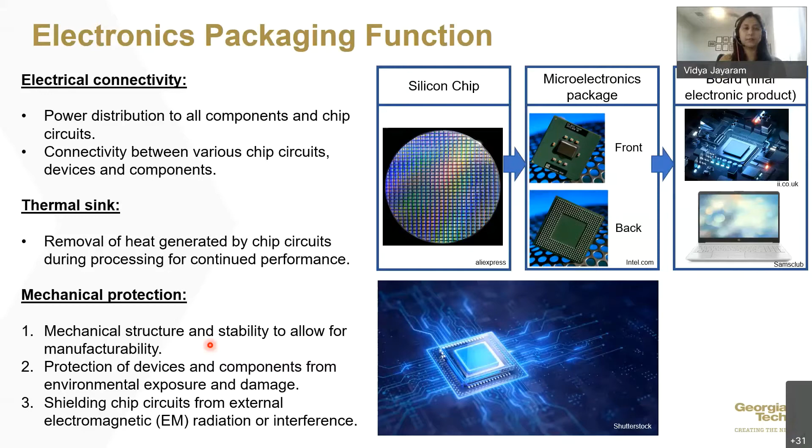Let's go a little bit deeper into what system level packaging is. I've described a high level process flow from chip fabrication to system level packaging to the OEM assembly where it goes to the final consumer. We'll focus on system level packaging, which involves the chip and board level packaging, and what the key differences would be.

However, there are some key differences when it comes to both of these. Typically, the chip level interconnections are tighter in pitch, smaller in size compared to the board level, which is much larger.

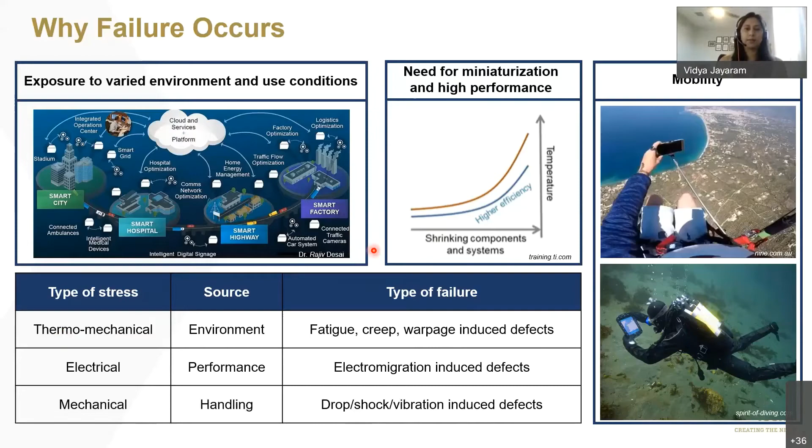So what's important here is, because of these drastic conditions our packages might experience, failure is something that is inevitable, and it's part of success. So it's important to learn from them, understand what is causing them, understand the time to failure, and how that can be managed to predict these fails and apply them to our end use case, making it sustainable and reliable for the time it's required to be functioning.

So it will never be a single point solution. It will always be a unique solution to each problem with all the interdependent factors. However, the interdependent factors are interesting, because understanding the impact of failure, how it can be managed, the impact of cost, and how many years it needs to be sustained, the concept is very similar. So with every growing trend or next improvement, it's important to understand all the failures we've seen so far, so we understand how to delay or manage it for the next improvement.

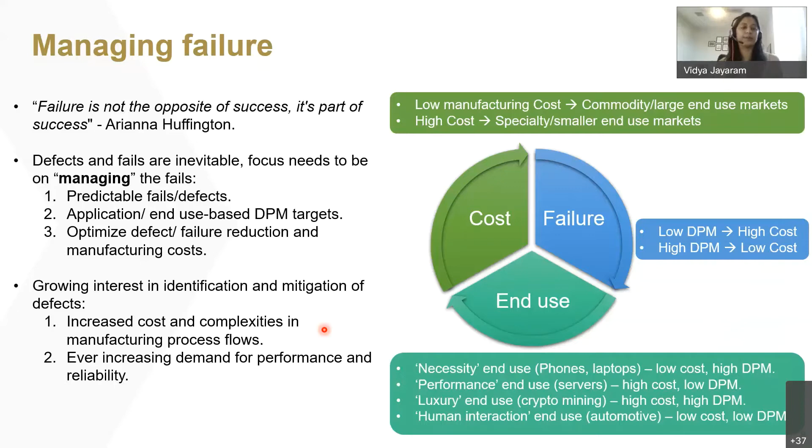So with managing failure and extending reliability, there are four main steps or guidelines to assessing failure and designing for a more reliable system. The first is identifying the failure mode and how to detect it based on expected failure modes seen in previous learnings, developing a risk assessment. Once you have that, you move to failure prediction, using tools like modeling to predict stress locations and failure modes through input of existing experimental data from previous learnings, extending that to your use case.

Once you have your failure modes identified and some understanding of what kind of failure you'd predict, you move to performing accelerated stress tests, selected based on what you've learned and what the model has predicted. Once you have this data, you're ready to design for reliability based on your package design, architecture considerations, material considerations, and process optimizations. We'll go a little deeper into each of these steps.

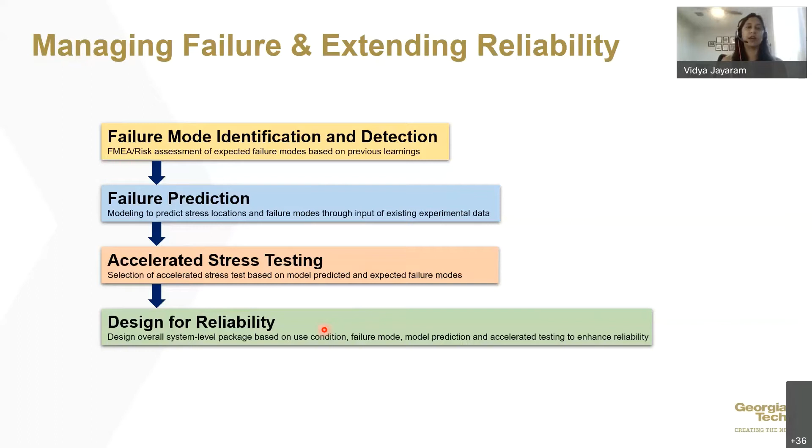So let's start with failure mode identification and detection. I have listed out in the following slides different types of failure modes that we would see in interconnections at the chip and board level, and understanding where these failures are coming from and what their mechanism is.

Starting with solder joint voiding, this is a common failure mode that we see in interconnections. They can have multiple causes for the same kind of failure mode. The first one here, you can see voids that are formed during processing. For example, when you have excess flux that is entrapped, and when this package goes through reflow, the reflow conditions may not be optimum, where it doesn't allow for the volatiles to escape efficiently. So they get trapped inside the solder, and that's how they form the solder voids. This is more of a processing related defect or failure.

But another type of void formation can be electromigration induced. This can happen over time while the product is in use, where it's a current driven diffusion, as you can see in the mechanism here, that's causing these voids. And electromigration can also cause the voids to grow and cause solder cracks or opens. So it's really important to understand when you see a failure, what is causing that.

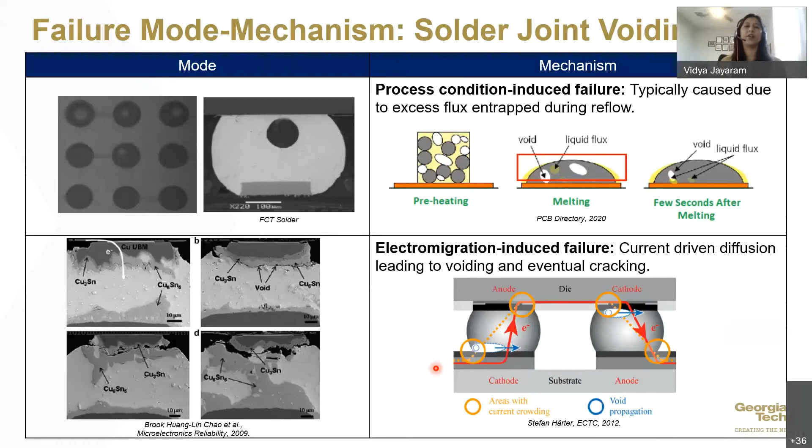Another type of failure is solder joint cracking. You can see images here of similar types of failure that are induced by different mechanisms. Looking at a process level mechanism, this could be warpage induced, typically caused by CTE mismatch. You have a silicon chip that is assembled on, let's say, an organic high CTE substrate. Because of the high CTE mismatch, you would see either a smile shaped or a frown shaped warpage, and that can lead to tensile stress. For example, where you have a smile shaped warpage, you can have tensile stress at the corner bumps, and that tensile stress can then lead to solder joint cracking.

Another type of failure mechanism for this crack is fatigue induced. This is more of thermomechanical stresses that are experienced by the solder joint. For example, with repeated heating and cooling cycles that can cause high shear strain, again leading to crack initiation and propagation at the weakest interface, which would be between the copper pad and the solder at the IMC interface.

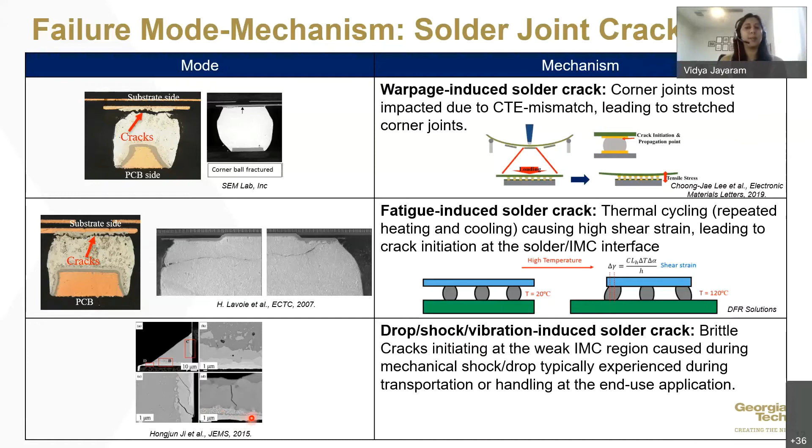Moving to the solder non-wet and open, again, there can be multiple mechanisms. The first one here is, again, warpage-induced failure, similar to what I mentioned in the previous slide, where because of the high CTE mismatch, you would see either a smile-shaped warpage or a frown-shaped warpage. For example, for a smile-shaped warpage on the corner, in the previous case you had a tensile stress that the bumps experienced because of being stretched, but there can also be cases where the corner bumps don't touch the pads, and that can lead to a non-wet or an open circuit.

And in some cases, you have the bump touching the pad, but it hasn't made a good enough contact to actually form a joint. So that can also lead to non-wet.

Another interesting mechanism for having a non-wet or open are bake-induced solder opens, and that is also more thermal stress induced. At higher temperatures with some level of humidity during bake, this can result in the solder being consumed to form the intermetallics, which can lead to reduced solder volume in the actual bump and lead to non-wets or opens. This would be a higher risk for reduced solder heights that you typically see at chip level, which are more prone to this bulk solder consumption.

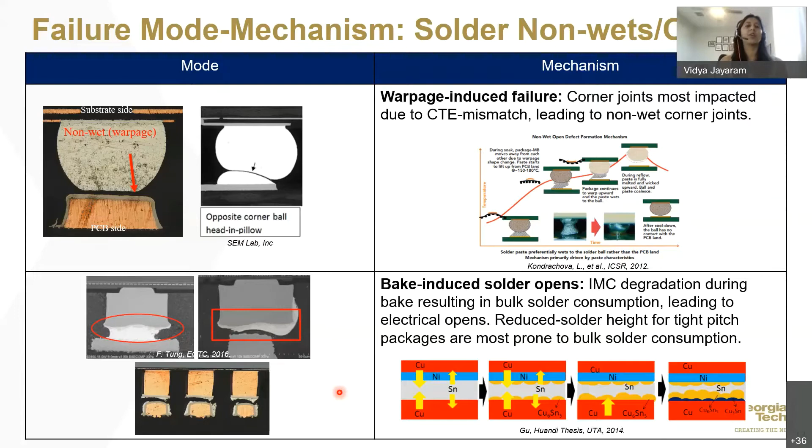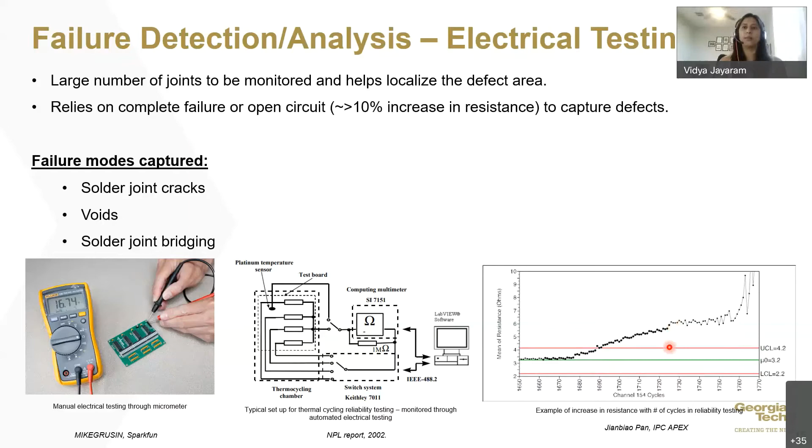Another type of detection analysis is metallographic microsection. Cross sections are actually very effective in detecting multiple solder joint failures. This method is a destructive test, involving cutting the samples, then mounting, grinding, polishing, cleaning, and micro-etching them to clearly see the cross section of the joint. These joints are then inspected through an optical microscope. This is one of the most common and effective methods to detect or analyze failure.

It can capture most of the failure modes like joint cracking, voiding, solder joint bridging, non-wets, opens, how the solder spread looks, post die pull/shear, etc. So it's an effective method to capture multiple types of defects through cross-sectioning. However, it is a destructive technique.

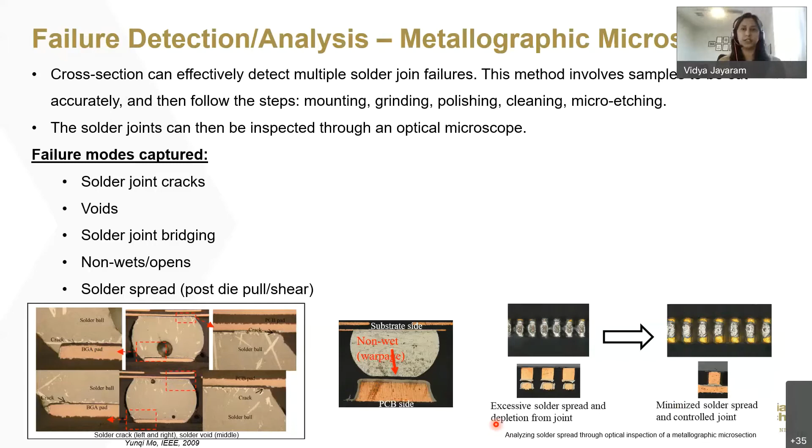Moving to X-ray. X-ray is a common technique used to detect failures in a non-destructive manner. It can detect damages to internal structures of the package. The main failure modes captured through X-ray are voiding, bridging, missing solder ball, or misalignment of the bumps, as you can see in these images. X-ray, I think, is a pretty effective non-destructive technique to capture these kinds of defects.

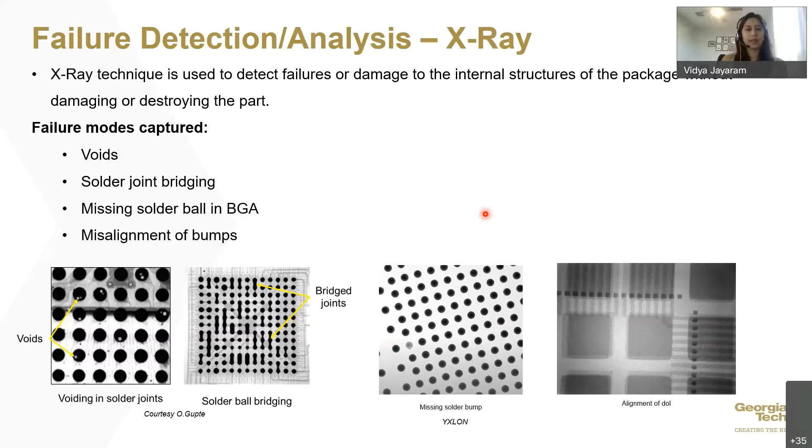Another technique is scanning acoustic microscopy, or SAM. This is also a non-destructive imaging method to evaluate inner structure failures. It uses two main properties of ultrasound: the fact that sound can be focused and that sound waves reflect at boundaries of different materials. These are the two main ideas behind using ultrasound to detect failures.

The main failure modes captured here would be voids in solder bumps, voids in capillary underfill, or mold encapsulation, like you see in this image. It's also very useful in detecting delamination and cracks. So this is another great non-destructive technique to capture a lot of these failure modes.

Typically what we see is we use the non-destructive techniques first to check for defects. And if we do see anomalies, then we can go into more destructive testing like cross-sectioning to figure out what's actually going on and get more information about the failure.

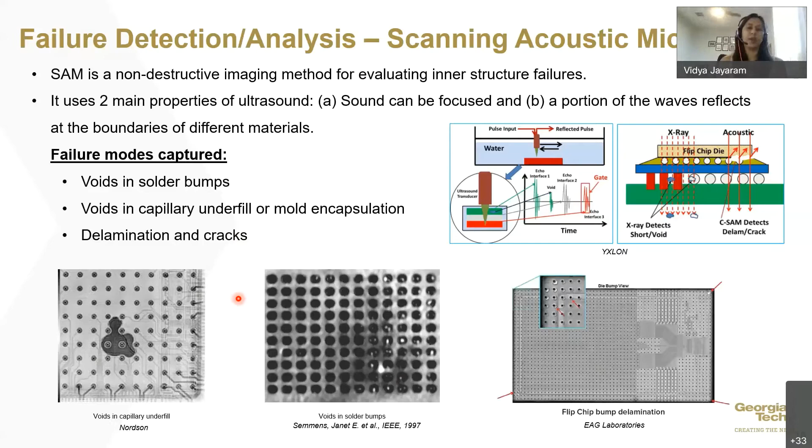SEM combined with EDX is another very effective method to capture defects. This method, actually even more so than capturing defects, gives us a lot more insight about what is actually going on, and this can help us figure out what the root cause of that failure was to begin with.

So it provides magnifications up to several tens of thousands of X, while the depth of field can still be in the millimeter range. That's one of the differences compared to cross sections, where you would have optical magnification, whereas SEM has electron microscopy, a higher level of magnification.

Combined with EDX, it's not just a higher level of magnification, it also provides input about the elemental composition, as you can see in the bottom right picture, where it can give insight about different atoms, elements, and the intermetallics that are formed. The typical failure modes you can capture with this would be solder joint cracks and voids, but more than capturing the failure mode, SEM combined with EDX is a very effective tool to understand the root cause of the failure.

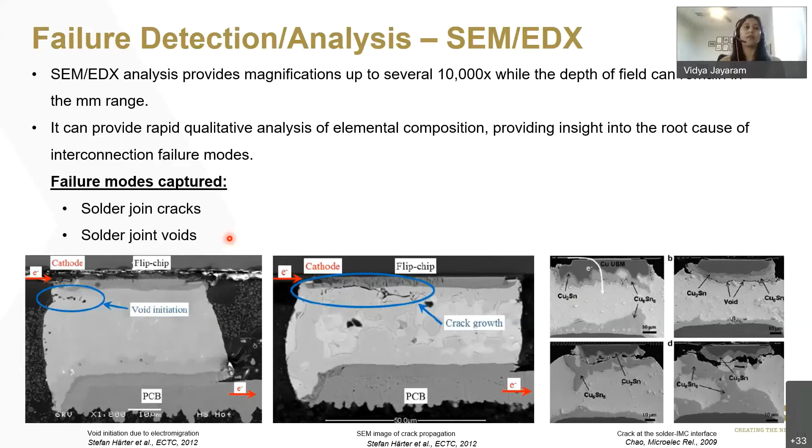So with that, we covered how do we identify different failures and how do we detect them. Having this knowledge base, I think we can move to how do we predict failure.

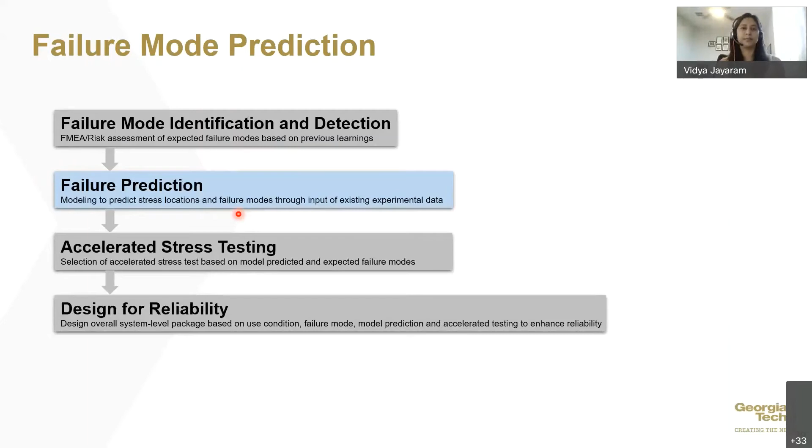For failure prediction, finite element analysis is usually used to predict different types of stresses and reliability performance. It can be used to model different thermomechanical stresses, bake, HAST induced stresses, but it can also be used to model process level information, like how much warpage we would expect based on the CTE mismatch, etc.

Typically it is coupled with empirical models like Coffin-Manson and Engelmaier, to name a few, to correlate how the stresses can be translated into the predicted time to fail. For example, for thermal cycling reliability, where you subject the samples to cycles of high and low temperatures, it can predict how many cycles to failure based on the input parameters.

So it's a very effective tool in predicting what the failure might look like. But before you even go to this sort of predictive modeling, it's important to understand what kind of failure modes you would expect so that you can model accordingly, since there's no model without existing empirical data and your input based on the failure mode that you expect.

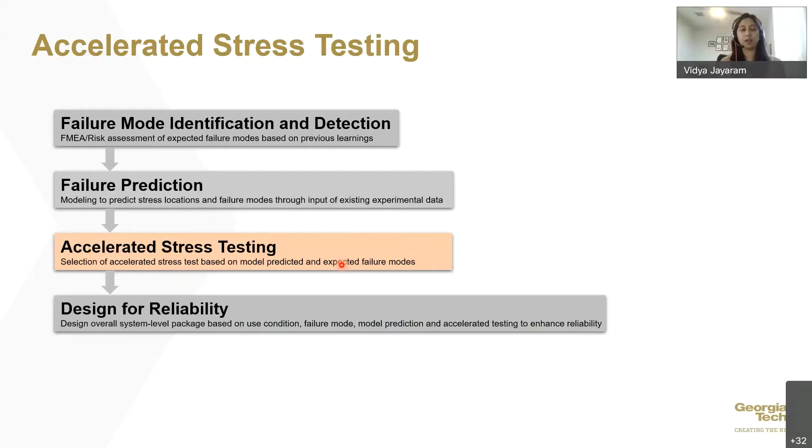The most important part about accelerated testing, or the key consideration for reliability testing, is that it should be able to mimic the use conditions for your product based on what kind of application, what kind of temperature ranges it's going to see, what kind of weather conditions, what kind of use conditions that your package is going to see. It is very critical to have your reliability test be able to mimic that sort of use conditions.

So I think what's interesting about performing this kind of stress testing is no matter what the use condition, no matter what the kind of reliability test that you're performing, you would see a similar kind of bathtub curve for the failure rate predicted over a product lifetime.

So in the beginning, you would see latent fails or early failures. This could be mostly induced by your process level yield loss. For example, when we spoke about voiding in the solder joint caused by process-induced failure, maybe the reflow conditions were not optimized for the void to escape effectively. These voids in the package can grow and lead to an open and early failure, but that's induced because of the processing. This is something needed for every single electronics package, where you want to weed out all the early failures and the latent fails, so you can focus on what you would expect to be a normal distribution for your process conditions and your fail rate.

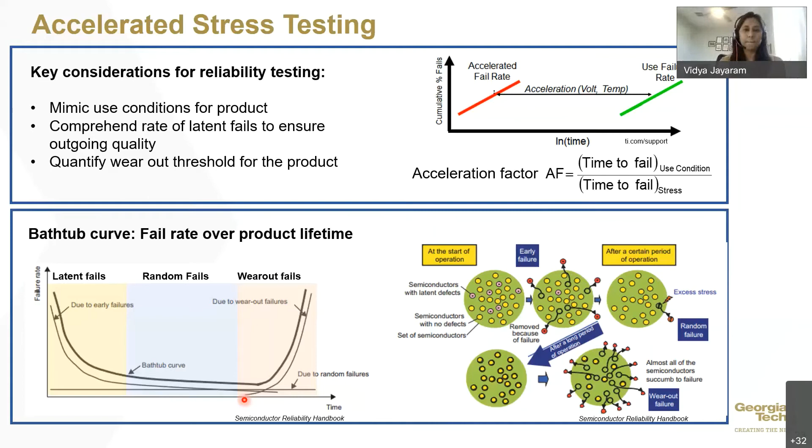So with that, let's go to what are the different types of reliability tests. You can have accelerated stress tests, and I know we spoke about it in pockets throughout the presentation so far. You can have temperature cycling, bake, and HAST, and we'll go a little bit more into details about all of these.

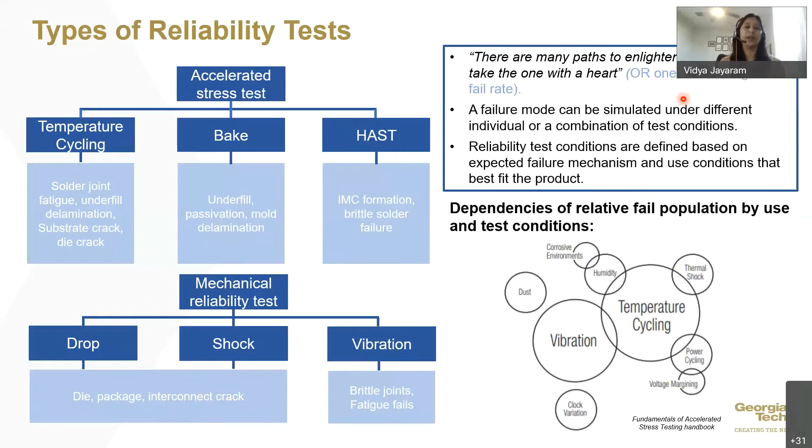So let's go a little bit deeper into each of those reliability tests. The first one being temperature cycling. This is one of the most common types of reliability tests that we would use to accelerate different fatigue related failure modes. What it is, is cycling from a really low temperature to a really high temperature, going in cycles with a specified period of time between the high and low temperature cycles.

So depending on the use conditions, these three parameters can be varied to simulate the environmental condition that you would expect to see as part of the product use case. Additionally, it can also be used to understand the thermal or thermomechanical stresses that are experienced by the processor itself when you're turning on and off. So those are typically the kind of simulated stress conditions where you have the environmental conditions and also the heat generated by the processor itself.

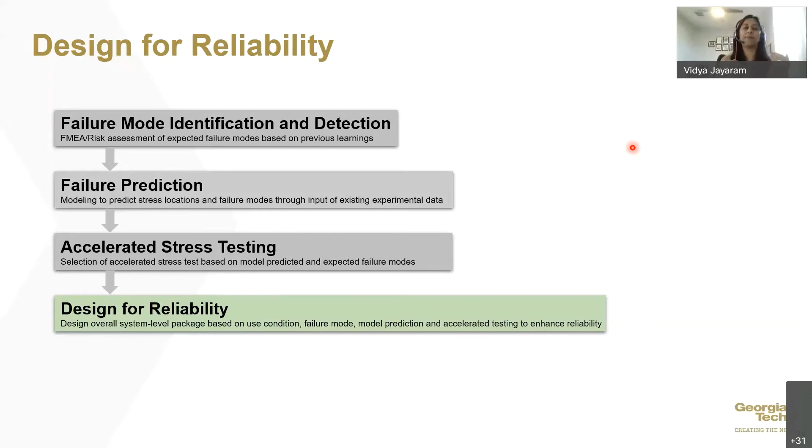What kind of materials do we pick? What kind of geometry do we pick? What kind of architecture do we pick? So many of these factors come into play for having the performance that you want, but at the same time designing for enhanced reliability.

Going into more detail about design for reliability considerations, you have three main components to it. You have the package architecture, where you would consider what kind of overall architecture you want to pick. Is it going to be a 2D or 3D package? Is it going to be wafer level fan out? Different kinds of architectures that you want to pick.

In addition to that, it would also include geometry, what your bump pitch is, what your die thickness is, what your bump and trace layout would look like, or what CTE you want to pick for your substrate based on what CTE mismatch you would expect. So it's a game of balancing performance versus stress.

The second consideration is material selection. Depending on the application and what kind of reliability you need, you can pick solder alloy materials like doped solders, or you can pick compliant interconnections, again, to balance the performance and the stress aspect of it.

In addition to that, you also have substrate interposer materials. Do you want a silicon interposer, an organic interposer, glass interposer, etc.? Again, based on your processability, cost, and CTE matching to reduce the stress.

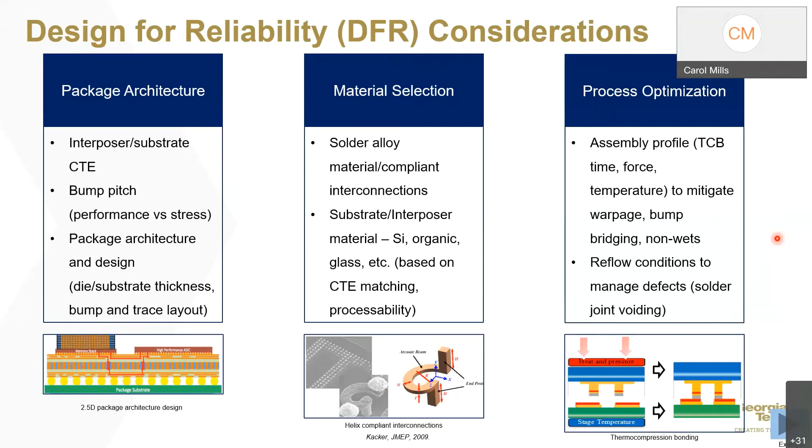Okay, I can go back to the slide. So the main purpose of the bake-induced failures is to stress it at a much higher temperature than what the package would experience, more to accelerate and simulate how the solder joint would get consumed or how the IMC would be formed over time. And that's one of the most critical fail modes that we capture using bake.

Did that answer the question? We will assume that it answered the question. If it didn't, please let us know.

Another question, how do you distinguish the cracks induced during sample preparation for cross sections from the cracks already existing?

Oh, that is a good question. I think one of the key steps in cross-sectioning itself is the sample prep, so we need to be really careful while preparing the sample. However, if there are some level of defects, I think going with the flow that I mentioned on what is the failure mode and how do you detect it, especially if you look at different techniques like optical microscope cross section, SEM-EDX, you can fundamentally understand what caused these cracks.

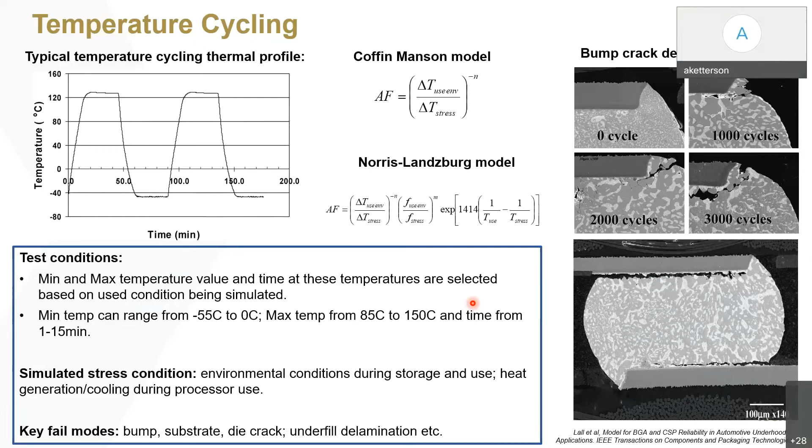Sure. High temperature storage testing causes the growth of IMCs, as you showed, which increases the resistance. I'm thinking here of the case of copper pillars that have relatively thin solder. What can be done to limit that change in resistance? Are there barrier metal layers you might want to have in there? And is it perhaps better to have a very thin solder joint so the whole joint becomes IMC? Is that better for resistance to changes in resistance caused by high temperature storage?

That's a good question. I think we do have different types of soldered joints or formulations based on what our use condition might be. But for something like high temperature storage, it's still not ideal to have a full IMC joint or a very thin layer of solder, since that can lead to brittle cracks. It depends on what kind of mechanical stresses or fatigue stresses that package is going to experience, in addition to just the high temperature storage.

So even if you do have solder that's getting consumed, the key is to understand two things. One is, when it gets consumed to form these IMCs, what are the different types of IMCs formed, and what is the nature of those IMCs? You can get that through phase diagrams, etc. The second is, what is the time to fail? Even if the free solder gets consumed to form IMCs, am I able to sustain for the time period or use condition and application that's required?

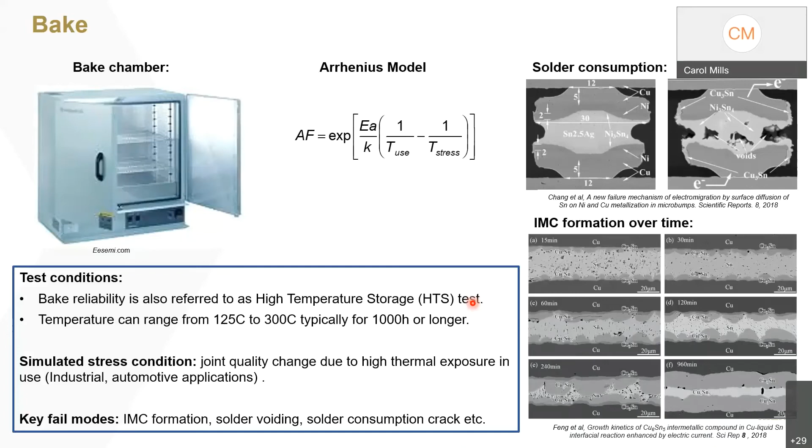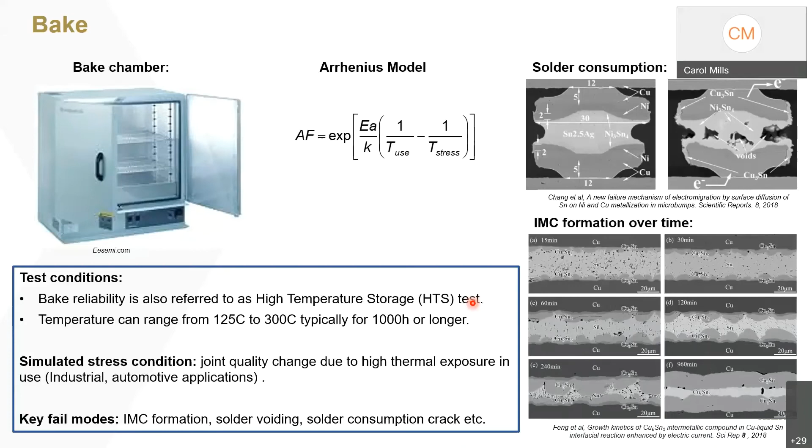Thank you. So we have a couple more questions. The first one, can you explain more on biased HAST? As the name suggests, is it like a biased voltage supply? For what applications would you prefer biased HAST over HAST?

Okay, so yes, biased HAST is where you have electrical voltage applied in addition to the temperature and humidity. Typically, we use unbiased HAST to simulate storage, shipment, etc., where we can capture interfacial delamination of the underfill, passivation, mold, etc. You would use biased HAST to simulate a functional part, because your part in use will be experiencing this kind of current flow and electrical voltage. So biased test would be more representative of not just storage and shipment, but also the part actually being used.

However, to be able to run the bias test, you need separate test vehicles with test structures to electrically test it. So it depends on what kind of test you want to select based on what risk level you see for a particular failure mode. Bias testing is more time intensive and more involved in preparing these test vehicles, whereas unbiased testing does not require that. So it's a trade-off between how accurately you want to simulate a functional part in use versus evaluating the risk of storage and shipment itself.

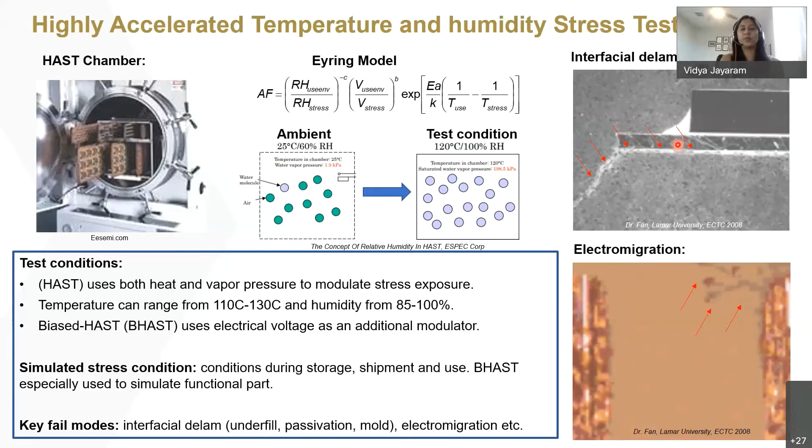When you talk about warpage induced defects, let me find the slide for that. So when you talk about warpage induced defects, you have a tighter chip gap height at the chip level compared to the board level. So there is a higher likelihood that you will make the connection with some level of warpage at the chip level, which would be a higher risk at board level, where your sizes are larger and the pitches are larger. So you would see warpage related failure modes more on the board level interconnection side, with solder bumps bridging and warpage related non-wet.

The same type of failures can happen at chip level, and they could be a different mechanism or of a different intensity. For example, if you didn't have good alignment while doing your chip level assembly, since the pitches are so much tighter, you could easily have a misalignment, which could lead to missing solder or missing bump connection, or bridging. So what's important is to understand, if this is my failure mode, what are the different mechanisms that could cause it? And that would also be related to what kind of process steps we have at chip level versus board level.

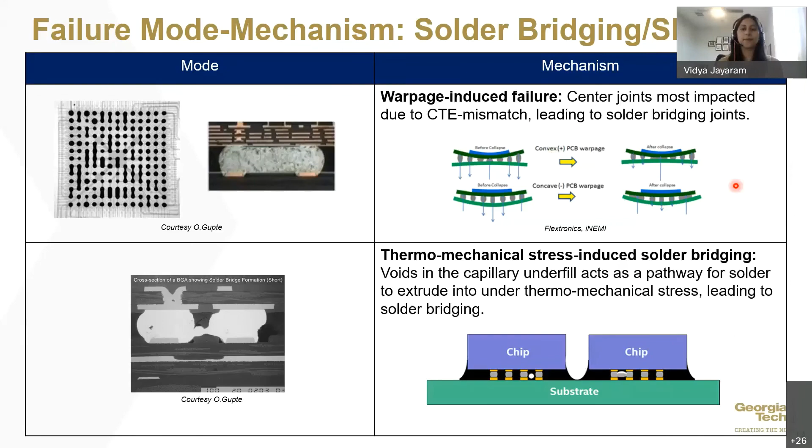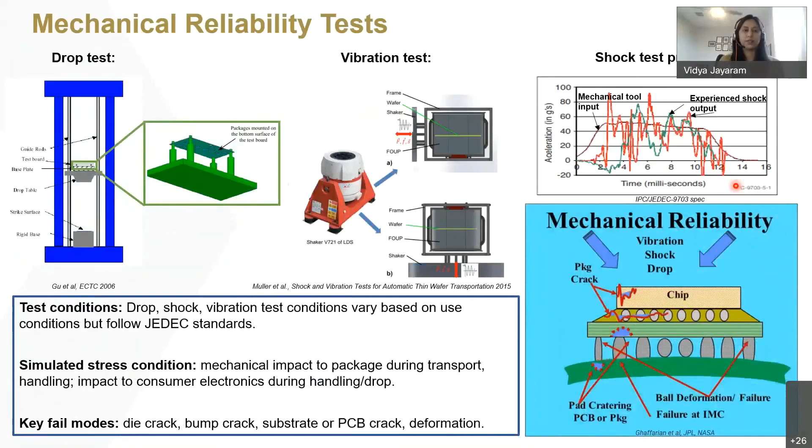So let me go to the example. I thought that might be an interesting way to kind of end the talk. It doesn't allow me to go to the link without... yeah.

Okay. So one of my projects at Georgia Tech PRC was to enhance exactly the system level reliability for a 2.5D glass BGA package. And we followed a similar structure to identify the failure mode, predict it, do some sort of stress testing, and finally design a system for reliability.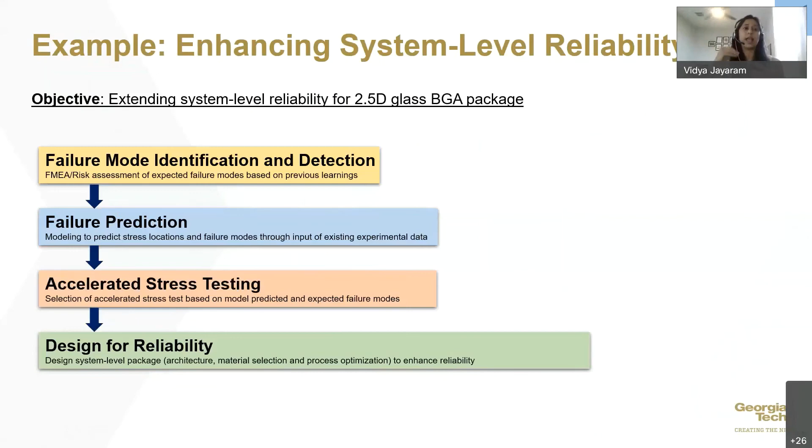So the first step in terms of identification and detection was to perform a risk assessment of what the expected failure modes would be based on previous learnings. So here we basically identified two main risk areas.

One is fatigue related bump cracks, where based on prior work done at the lab itself, we saw failure at the BGA bump, closer to the substrate and bulk solder interface, for a low CTE glass, and we saw how that failure propagated to the lower end by using some sort of strain relief mechanism like a polymer collar. This is less likely to fail compared to the one on the top. So that's how the board level reliability was extended. That was one learning.

And the other one was warpage related or warpage induced defect, where we saw that it was critical to optimize your process conditions to get the minimum warpage possible during processing, so that you don't induce additional failure modes. So here the warpage was dependent on the thermal compression bonding at the chip level, by changing the temperature profile that was used.

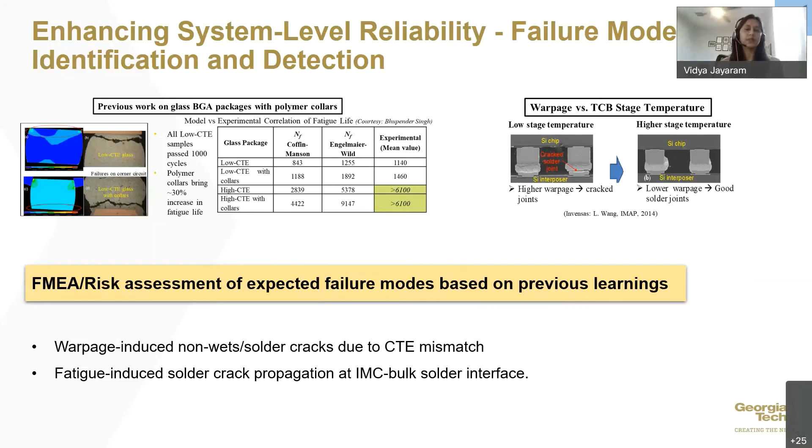So these were the two key failure modes that were identified. And then we developed a model around it to predict what kind of failures we might see, and if that's similar to the learnings that we've had in the past. So we modeled for warpage and we modeled for thermomechanical stresses.

The warpage modeling had a couple of components to it. We modeled the warpage with different CTE of the glass interposer, and saw how the warpage was modulated, or how the room temperature warpage was modulated accordingly. And this was at chip level assembly, and we also looked at after board level assembly, since it's critical to look at both, because something that impacts at chip level might have a worse effect on board level assembly.

So at board level, since our printed circuit boards are high CTE, overall the trend or the intensity of the change in warpage was lower compared to chip level, since there is a lower CTE mismatch here compared to chip level.

We saw a trend where increasing the CTE reduced warpage. For a BGA model or thermomechanical stress prediction, we modeled a 2.5D design and subjected it to thermal cycling stress to see where on the joints or where in the package would be the high stress locations.

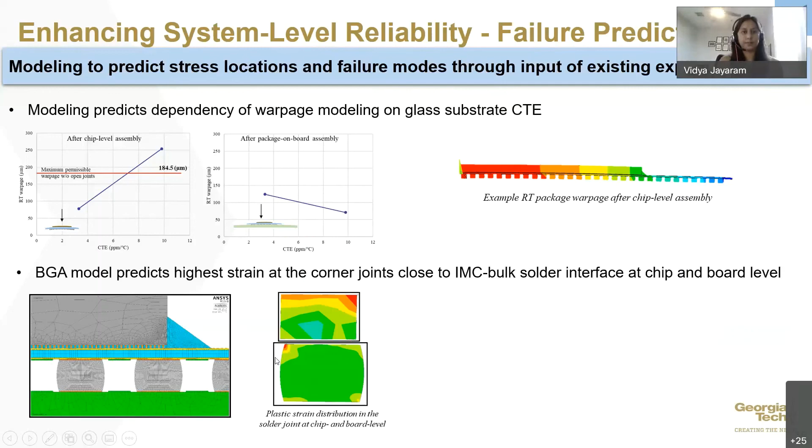The high stress locations were at the corners of the chip and board level interconnections. The next part was to run accelerated stress tests to understand what kind of failures we see, and I used some of these images to explain the different failure modes and mechanisms. We saw two types of failures: process-induced failure, where because of high warpage at chip level, we did not have good contact of the corner bumps to the copper pad.

We also saw fatigue-related failure mode, where stressing it with thermal cycling test over time led to solder crack at the IMC bulk solder interface, which was the weakest point.

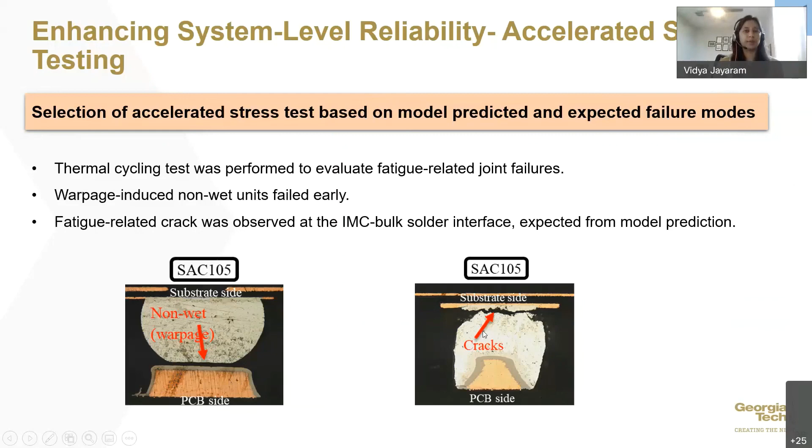At this point, we had to design a system to extend our system level reliability, considering the chip level defects and the board level defects. So we used the approach of package architecture, material selection, and process control.

The first part was to model this 2.5D system to check for chip and board level fatigue life as a function of the glass CTE. We used the property of glass with tailorable CTE to check what CTE would be optimum to have chip level as well as board level reliability balanced, since they're both going in opposite directions.

Overall, that model was really helpful in figuring out what kind of strain relief mechanisms we want to use. For example, in the prior learnings, we saw that having polymer collars around the BGA changed the location of the crack from the top of the bump to the bottom.

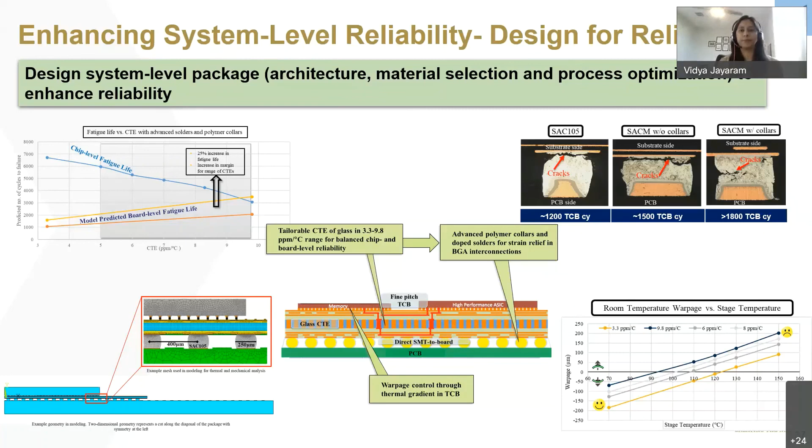I think that was a good example in terms of how we went about dealing with failure, managing it, and extending our reliability accordingly.

When I joined and initially decided this was the project I wanted to work on, I wasn't feeling good about the fact that there are some failures while processing. But towards the end of this project, I was rooting for failure. I was excited when I saw a failure so that I could go run all of these detection analysis methods to figure out why the failure occurred, because if something doesn't fail, you don't quite understand all the stresses that your package is experiencing.

So the one thing that I definitely took from my time at Georgia Tech is that failure is critical, failure is inevitable, failure is fun.

In summary, I think it's important to comprehend system level reliability as our packages trend towards higher performance and complex architectures. Failure is inevitable, and how we manage it is critical based on the kind of application and end use. It's important to optimize the fail rate, but also keep in mind the development costs and application requirements. We need a systematic approach to identify and predict failure and extend reliability.